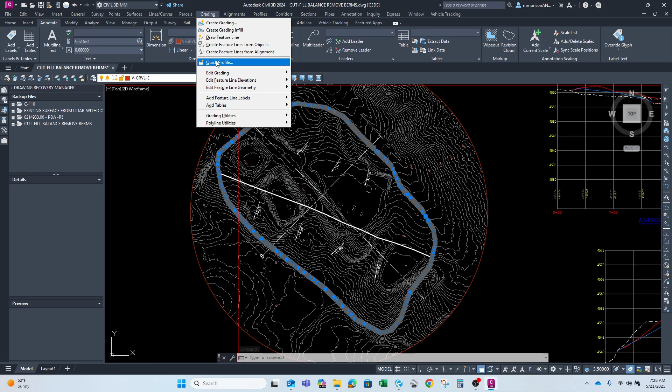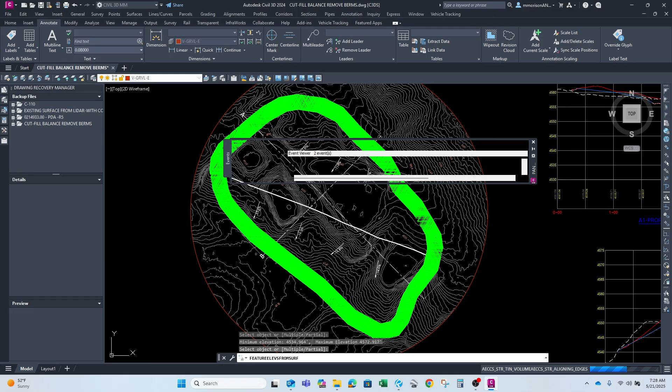And I'm going to go to edit elevations, elevations from surface. I'm going to pick my existing topography. I'm going to leave this insert intermediate on. I'm going to accept that. Then I'm going to pick this line. Going to enter on that guy. And now that is up and touching every TIN line on that existing surface, right? That's the key here. Okay, give it a second here to think about it. Okay.

And then what I did is I just literally took and made a surface with that one polyline. So I called it reclaimed slope unedited. I'm going to go ahead and turn this on so you can see it now. Okay, AutoCAD has to think a minute. This is when you enjoy the day, right? When it's thinking. Okay, let's look at the surface properties.

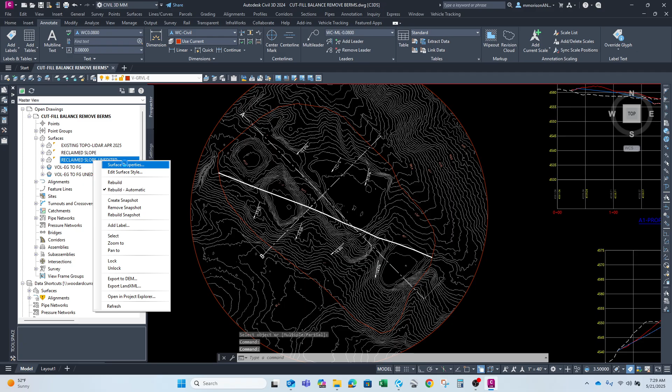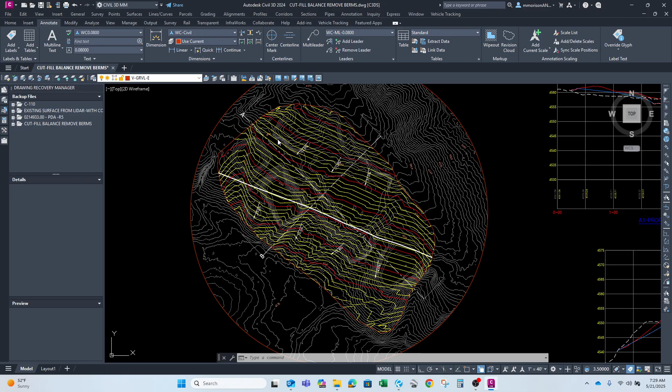Let's go to the definition. So I literally just added that break line, that outside break line in there. It's a 3D polyline is what it is. I accepted that in there and then said, let's contour and just see what it does. And what it's going to do, it literally grades high to low, just straight across the whole thing from every single point on that 3D polyline around that edge. And so really what you've done is you kind of pushed away all of that junk that was built in there, right?

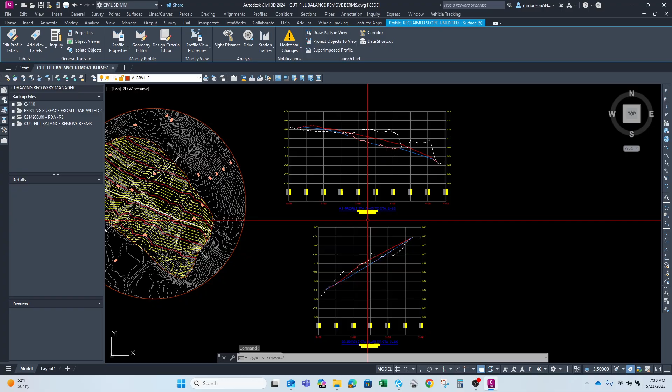So then what I did is I made two profiles, an alignment here and an alignment here. You can see that. And I dropped them in over here. And so this is my existing here. And this is my new one that I just created. And you can tell it's pretty rough, right? Because it doesn't know what to do in between, but it gave it a pretty good shot. And then down here, the same thing. Boy, you could tell it's just straight as an arrow, right? Top to bottom, like I said.

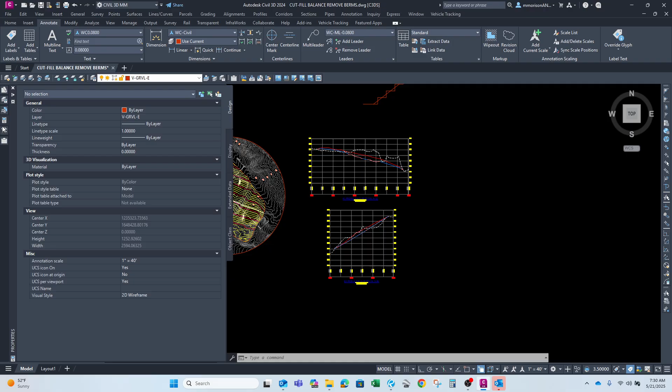But you're after a volume now. That's step one. I'm tired already. Gosh, we've done a lot. But now the cut and fill balance, that's where it gets trickier, right? So I created the volume surface. We'll go over here and look at my volume surface. And I compared the two, right? It's just a volume TIN surface created. And I used the existing versus the unedited slope that I have shown there. And we'll look at it.

And I'm way, way more cut than fill. It's just not even close to balanced, right? It's like this won't work. So I understand that. I get it. I knew it was going to be kind of like that. Most of the time, I can get pretty darn close with grading out.

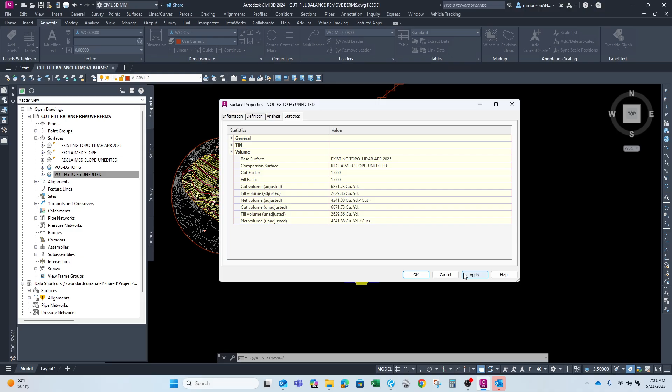But this one, they've got so much stuff going on. It won't cut and fill balance just with doing that. So I have to sit back and look at it. Well, I used my profiles to do this because I said, okay, I could tell I've got a ton more cut than fill. I need to kind of raise it up a little bit.

So I kind of got to studying this a little bit, and I looked out here and I said, well, what about at 3+00, maybe the grade needs to come up to 4554 or something like that, right in here, and just bump this up and see. So I looked along my alignment, I found that station at 3+00, and I said, oh, 54 elevation. This is my 54 elevation right out here.

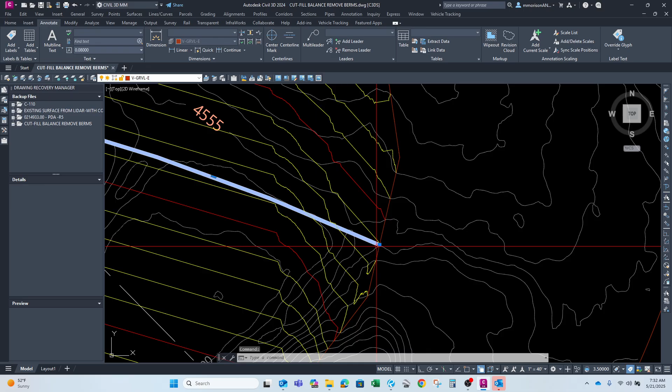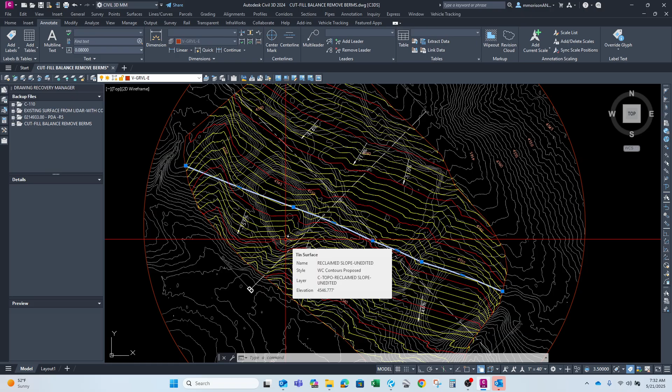So I hooked a polyline on at 54 right here, made sure it hooked on to 54, and took a polyline with a few grip points right out across and hooked to the 54 existing out here. So there you go. I said, okay, let's use that line. Let's add that to our surface and see what happens, because I want to make that a high point there. So let's drag this one out. Let's get this one out of our picture here.

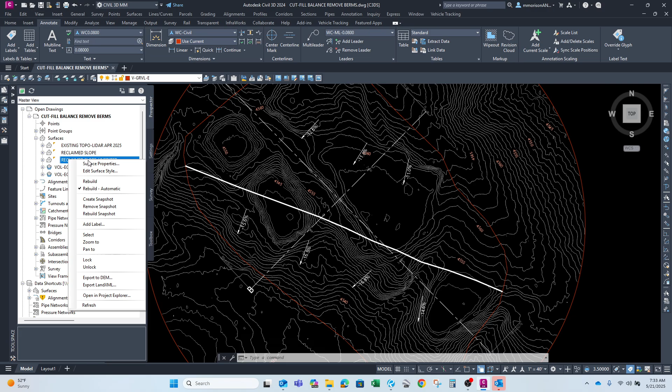Okay, let's bring in now a surface, and I will show you all it's got in here. It's got break lines. Oops, sorry, wrong one. My bad. So I added that outside break line, called it daylight, and I added the one line I drew across there, period. That's all I did. Let's look at it. This is gonna blow your mind.

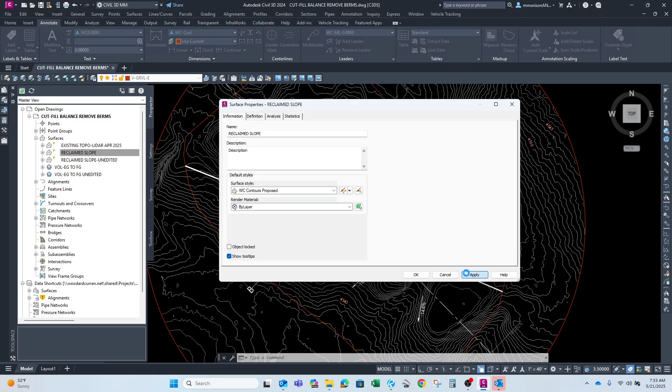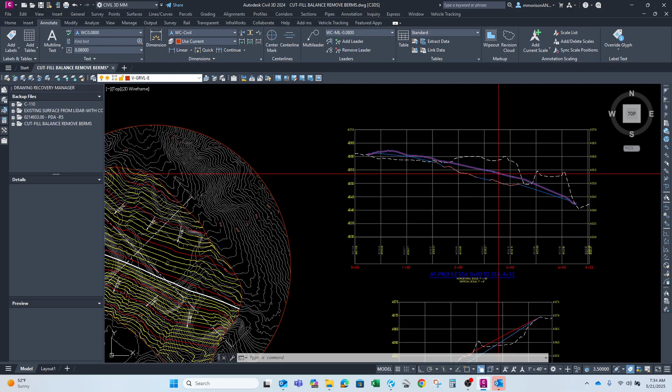Now it's beginning to look so much better. I flattened the slope out. I made this a hinge point to where it breaks down here, and I've raised it and made it much cleaner, right? It's not 100% yet, it's still a diamond in the rough, but let's look at it now. So that's the red line here. Now I've bumped it up, created a much cleaner slope coming down here. Look at this one, that's spot on, right? I can tell I'm beginning to balance this thing out just by looking at cut versus fill here.

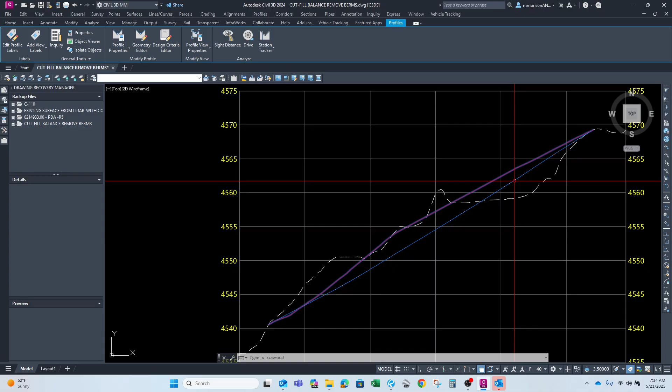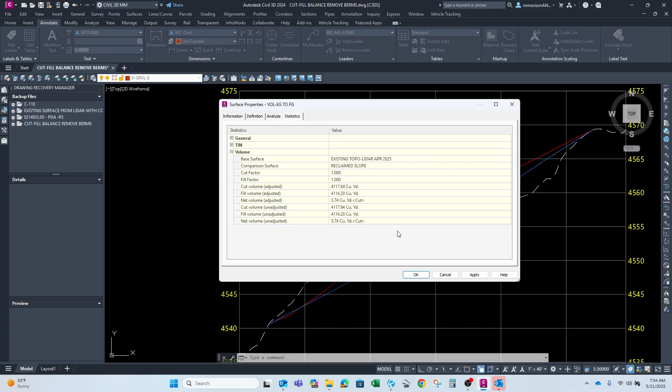But what happened to our volumes now? That's what I'm after. So now I compared the two surfaces, my new edited one and my existing. You see that here, existing versus reclaimed slope. Let's look at the volume. Can you get any better than that? My cut and fill balance, you're not even going to have a shovel's worth of dirt left over. Once I drew that line across there, I knew I wasn't going to hit it spot on. I wasn't going to circumcise a gnat with it.

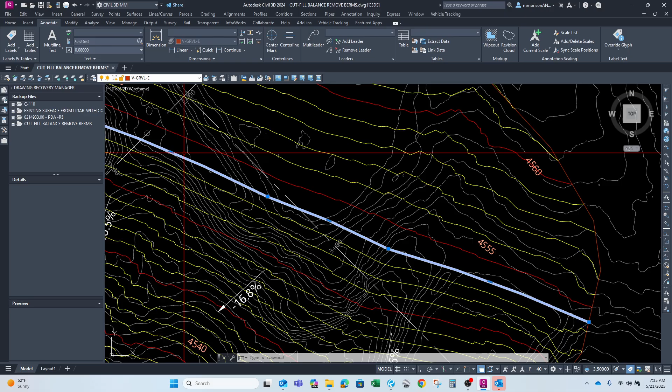But I started dragging these grip points back and forth just a little bit on my polyline, and then I started looking at my cut and fill balances, because the minute you move these grip points, you're going to either increase cut or increase fill. So that's all I did. I'm not saying I'm done, but you're so much further along than any other method I could have used. You could have tried any other method, but you would have been goofing around a lot.

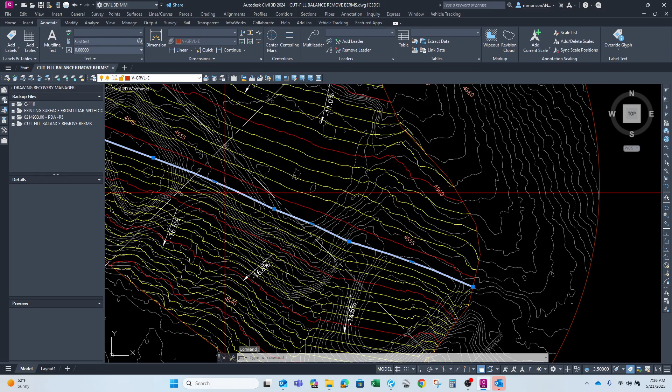Now I would probably go in and start adding polylines, hook on, and put nice smooth polylines across here that represent the contours, hooking on to the existing ones, and add that to the surface and really smooth this out. Once you do, your volume is going to change a little bit, but so what? You just grab grip points on a couple of your polylines and move them back and forth a little bit, and you'll start dialing in. You'll get a feel for it once you do it.

I hope you appreciated this video. I did a full grading plan with 2 polylines.